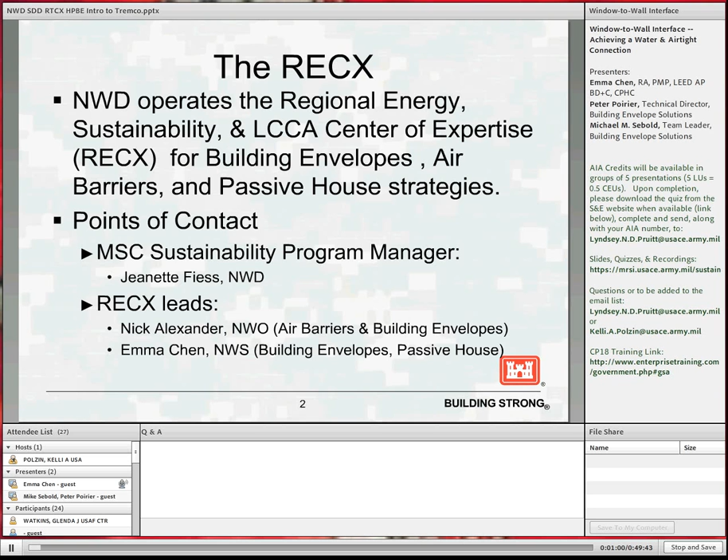Our team across NWD has put together training classes and webinars, and Nick Alexander just headed up the team that wrote the ECB and Field Guide for Construction Quality Assurance of High Performance and Sustainable Building Envelopes. He also teaches the Prospect course on building air barriers and pressure testing. The Passive House team provided reviews for Passive House compliance, and Kansas City District is...

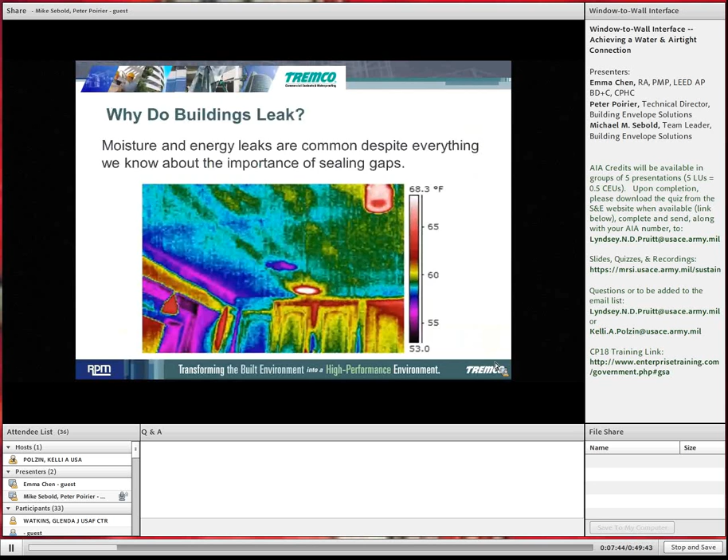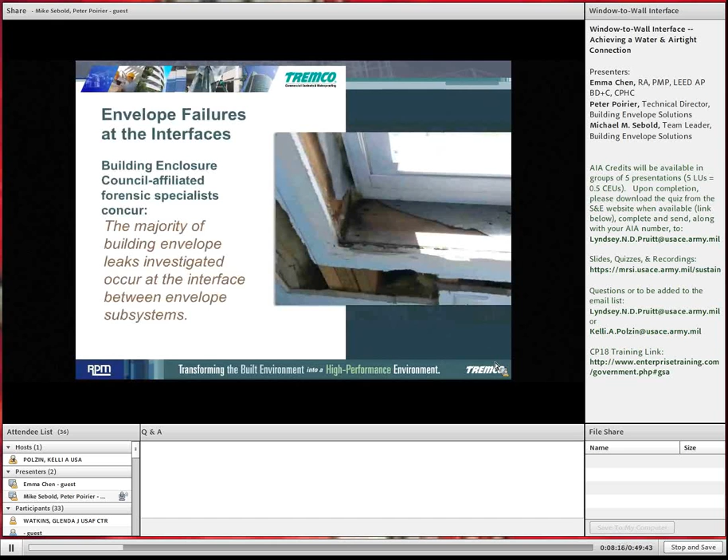So we begin with why do buildings leak? Despite all we know about buildings and the importance of sealing gaps, buildings still leak. The reasons for this envelope failure: there's no single source of responsibility for quality control, spec enforcement, and building envelope integrity, and it often comes down to accepting the low bid and lowest technically acceptable solution, which translates to failures. When we talk about envelope failures, they're traditionally at the interface. The Building Enclosure Council, as well as affiliated forensic specialists, concur that the majority of building envelope leaks investigated occur at the envelope interfaces.

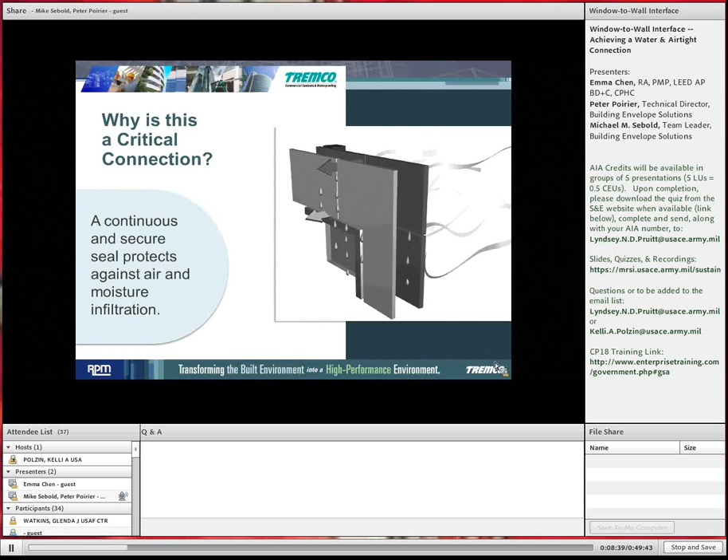So what are these interfaces? The window-to-wall tie-in connection is a transition between air barrier and window or curtain wall systems or cladding systems. Why is this connection critical? A continuous and secure seal protects against air and moisture infiltration. And why is this infiltration important? This is a critical connection to help achieve the air tightness standards you've set, as well as achieve the facility life and design life cycle of the building, to achieve energy mandates, reduced maintenance costs, and to meet new aggressive industry standards that will become building code in coming years, in particular the ASHRAE 189.1 update that will go into effect in 2015, indoor air quality, as well as risk management.

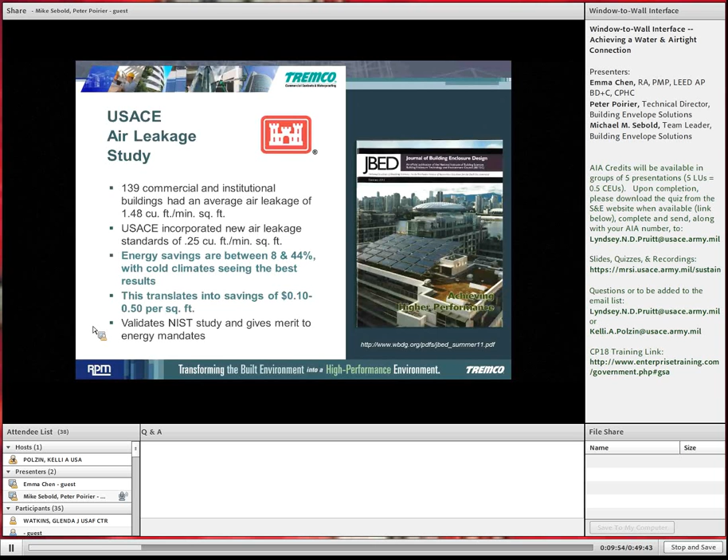When we take a look at air leakage, the Corps has been very progressive. This is a study published by Alexander Zhivov and Dale Herron of CERL that talks about the importance of air leakage and the significant energy savings that result. As you can see, this validates the NIST study and gives merit to the energy mandates, showing there's a direct correlation between air leakage and achieving energy mandates, in addition to providing better indoor air quality.

So when we take a look at current practices in real-world installations, a lot of these current practices fail under minimum performance requirements. These real-world issues arise and are preventable, but mostly they lack proper coordination, the sequencing of trades, quality installation, and on-site testing and commissioning, most of which the Corps has been addressing.

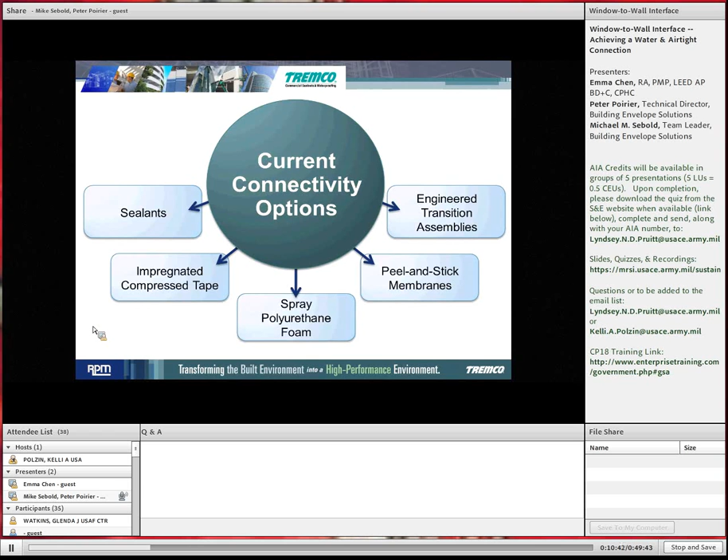The current connectivity options within the industry are traditionally sealants. We've seen an influx of impregnated compressed tapes from the European markets. Spray polyurethane foams are commonly used, as well as peel and stick membranes, and we'll close on talking about engineered transition assemblies, which is really where the market's moving to develop performance seals in these connections.

As we talk about sealant connections, they address air, liquid, and water vapor at the connection. They're traditionally a silicone or a urethane. They can handle a variety of sizes, but once you start getting to large openings, the sealants don't work that well, particularly over 2 inches. You need to match the proper sealant movement with the proper movement in the sealant joints. The windows must be set before these connections, and sealants are weather dependent.

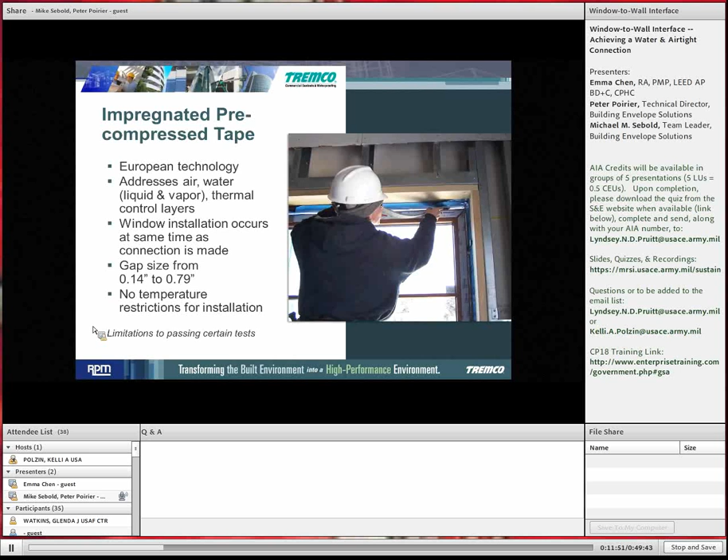As we talk about pre-compressed tapes, it's a European technology which is unique because they address both air, water, as well as a thermal control layer, which is very important in meeting your energy goals. These materials are commonly installed when the window installation occurs, and the gaps sometimes can be limited, but depending on manufacturer, you need to take a look at the sizes. But one of the big benefits is there are no temperature restrictions for these types of installations.

Spray polyurethane foam is becoming a standard in the industry, and not necessarily a good one in all applications. They still require sealant beads to make the connection to assure an air and watertight seal. Proper expansion is required of the material, so you need to take a look at the application for spray foam. The spray foams traditionally have limited pore adhesion as well as movement capabilities, and you also have a shrinkage potential.

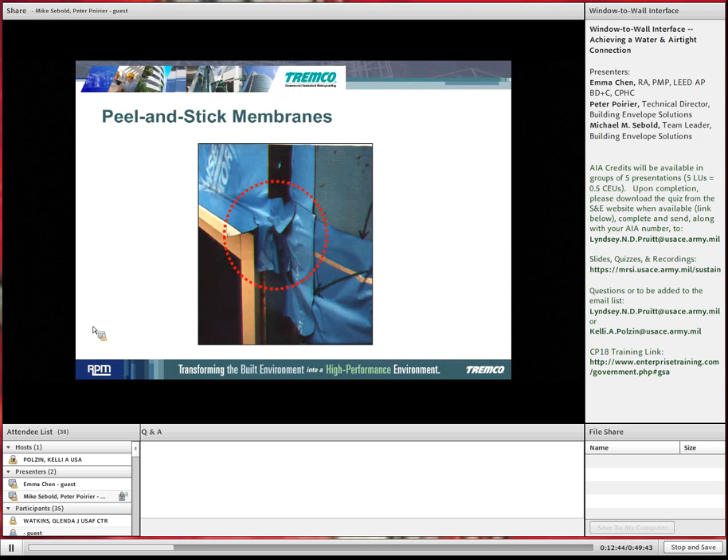So although they look like short-term solutions for stopping air and water, the long-term effect is sometimes far outweighed. Peel and stick membranes are also commonly used for this connection, and one of the challenges for peel and stick connections, as you can see here, is corners and how you lap and treat the corners of window frames and actively moving joints.

In addition to the different materials out there, we need to take a look at compatibility concerns with respect to these window-to-wall conditions. In particular, when you have air barriers that traditionally use asphaltic mastics for the connections coming in contact with sealants, whether silicone or urethane, you need to look at the compatibility. These traditionally can lead to leak point sources when the materials are not compatible.

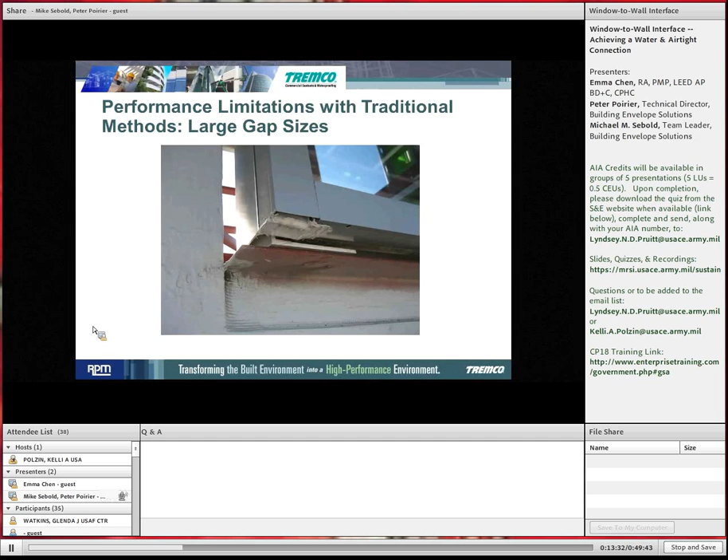The other challenge in sealing these is the limitations with traditional methods for these large gap sizes in windows. We're seeing larger and larger gaps in these openings, and traditional sealant and foam conditions can't transition these assemblies, because the continuity, especially around hollow mullions or open-ended stems, becomes critical. Long-term performance of these materials is also critical.

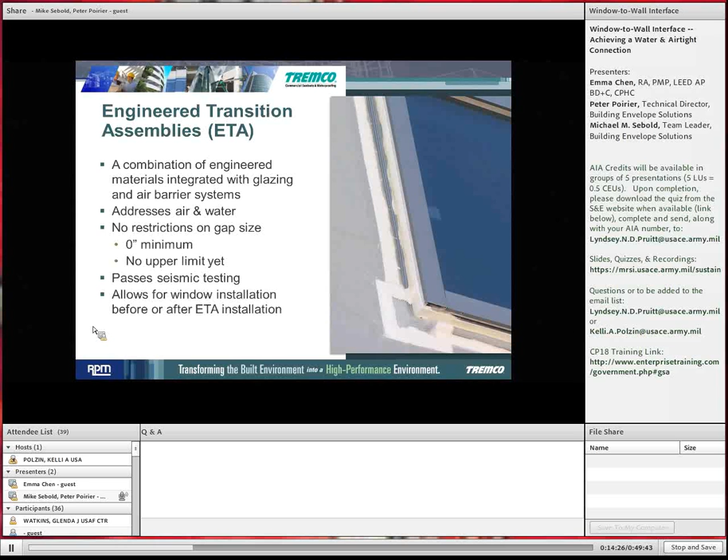This leads us to discuss engineered transition assemblies, or ETA. This is a combination of engineered materials integrated within the glazing and the air barrier systems to address air and water. There's no restriction on the gap size, so we can handle small joints as well as large joints, and it passes seismic testing, which a lot of the current solutions on the market do not. This also allows for window installation before or after, which gives the contractor flexibility for sequence of installation.

So as we talk about air barrier connections along with engineered transition assemblies, this will provide compatibility and long-term continuity for your building envelope.

These are some of the lessons we learned from U.S. Army Corps projects. Sometimes there's not enough detail from the architects on the drawings to make proper connections. If a building fails the airtightness test, post-construction fixes, which are traditionally spray foam, traditionally become insufficient.

Especially as the building weathers on, the critical connection between both the roof to wall and the window to wall has always been a connection that's been referred to by others as lacking responsibility in the trades within the field. This leaves some of the details to the contractor, which leads them to cowboying or creating field fixes for these solutions, not engineered solutions. So who's responsible for ensuring a tight seal at the window-to-wall connection?

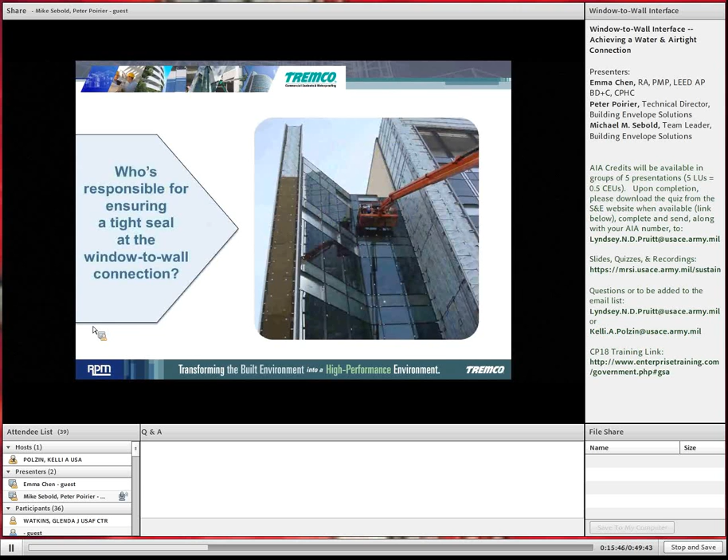Typically, as Mike was mentioning, the architect is working with simple details taken from different wall manufacturers, as shown here with a typical pressure bar system. In this application, the contractor has indicated the perimeter sealant bead on the pressure plate is their primary seal. Another wall manufacturer will dictate maybe the seal needs to be on their mullions at the structural condition. But in either case, that's their primary seal responsibility, yet they're showing very simple sealant beads.

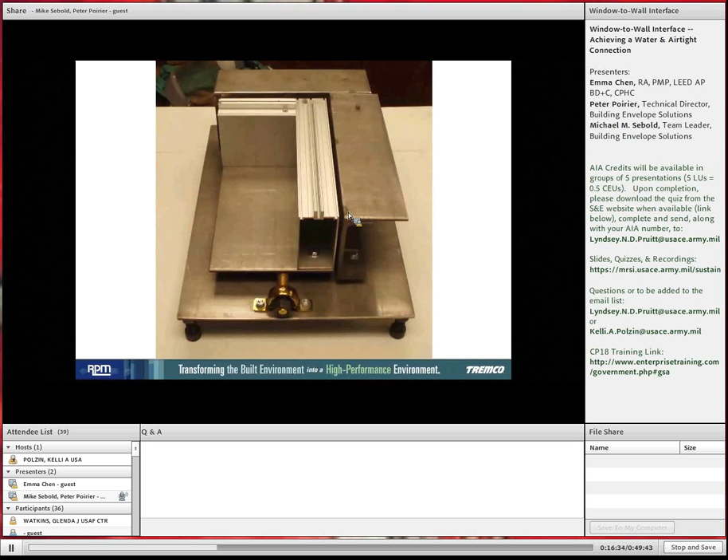From that, we went ahead and built the test jig. We took a customer's pressure bar system and mounted it in a jig. This jig allowed it to move for thermal movement and seismically, and we could also control the joints around the perimeter, increasing it from 1/4 to 1/2 to 1 inch, whichever material we were trying to achieve or test. Typical application here is a simple 1 inch joint at the head of the window.

As the sealant moves, the mullion moves down. Obviously the sealant accommodates that movement. This is the primary application, and it works fine if it's properly installed.

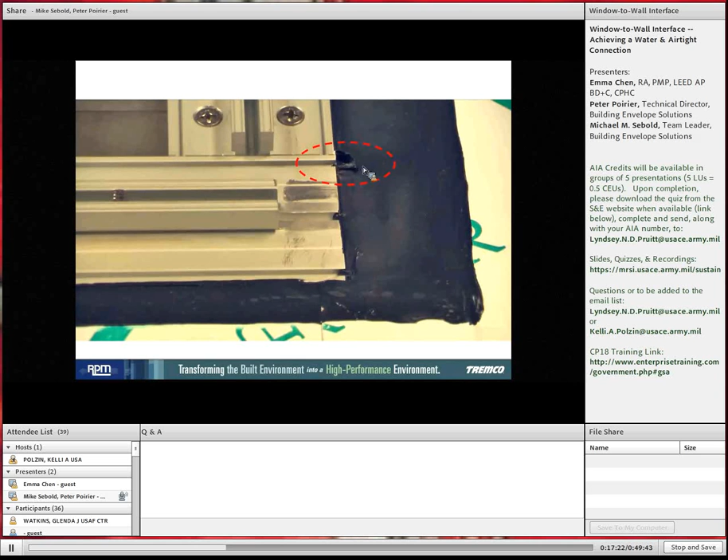However, when you start looking at a vertical condition, like we have here at the head condition, what you've got is a cut piece of metal, so we're just applying sealant along that cut edge. But as the joint starts to move, if there was an incompatibility with the sealant used to seal the metal joinery, or if the contractor left some debris along that edge when cleaning it, you may end up with a pinhole or leakage point. As this joint moves back and forth, that pinhole will actually propagate and tear further through. So when you test it, just by looking at it, you could never tell that hole was there until the wall starts to move seismically or thermally.

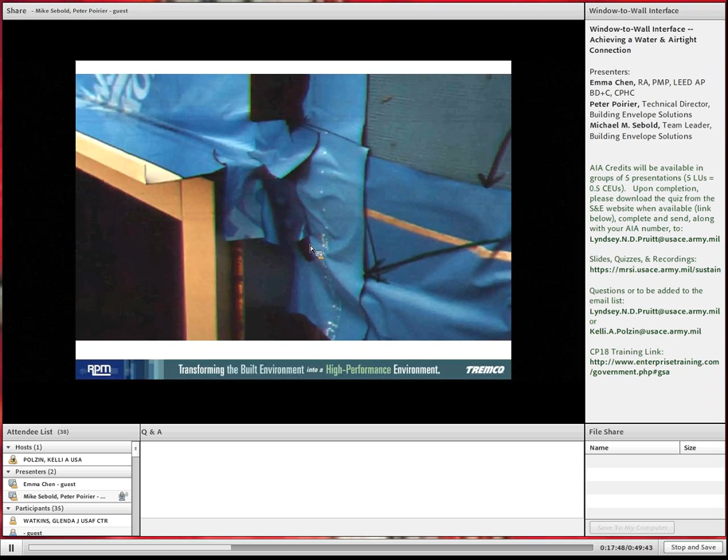Here we have an application where typically you see the wall being moved out for added insulation. It's a difficult connection to make with a sealant bead when you have open ends of metal. So as Mike mentioned earlier, people started using peel and stick products to span unsupported gaps, which isn't designed to do that.

Here we're wrapping a window in a precast condition, but as you can see up close, now the sealant is pulling away the peel and stick from the substrate, creating potential leakage and obviously aesthetically unpleasing results. It'll bleed into the sealant, and we have a loss of bond.

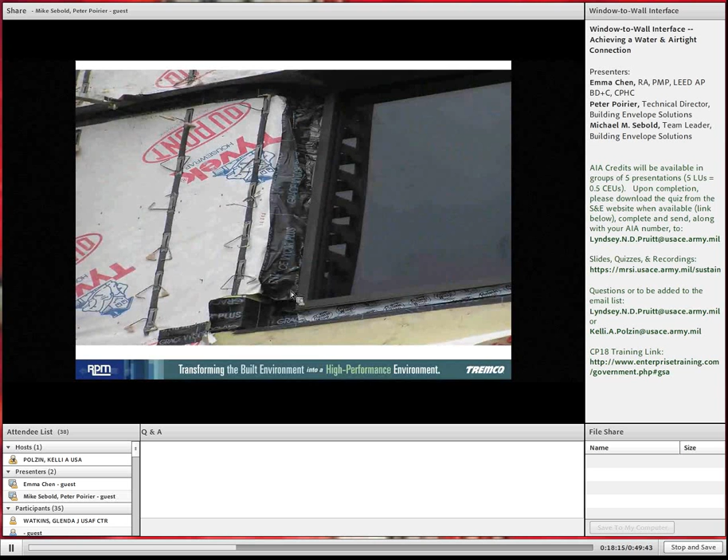Trying to mix different materials for the air barrier membranes isn't very effective. This is a building where they actually had to start tearing off the brick veneer because the peel and stick products working with their weather barrier materials weren't compatible with one another. Obviously the contact area wasn't very good, so they had to replace everything.

So to test those products, we put them in the same jig. Here you can see the product does allow it to take the movement in the head, but as soon as it starts to extend past its installation limit, it will pull itself off.

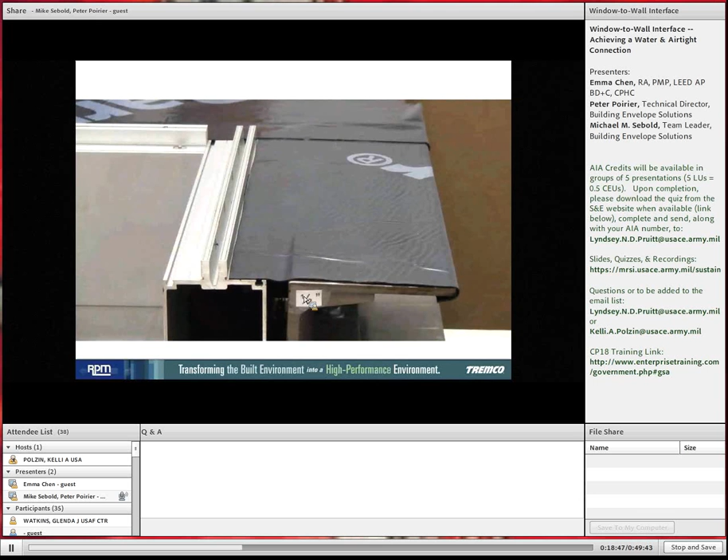Looking at the jamb condition, many manufacturers will indicate that they can span a 1/2 inch without an issue. But here we're looking at only 3/8 of an inch of movement, and what you're seeing is the product peeling off from the different substrate of the curtain wall.

In this case, you would think spanning only 1/4 of an inch of contact would be less of a problem. But here, the movement with still just 3/8 of an inch creates more shear on the membrane and pulls itself off. This is just after one cycle of opening.

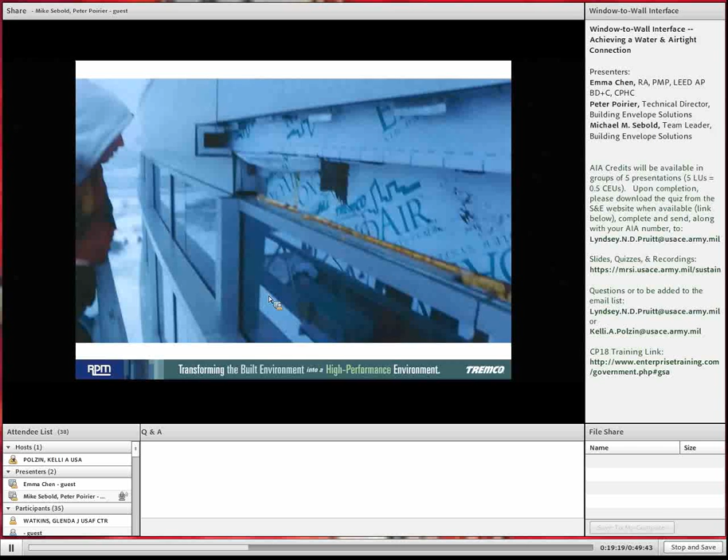As Mike was mentioning also, people are using spray foams. In this case, metal panels had to be removed because the spray foam was not effectively applied, and of course during any movement it compressed and left openings.

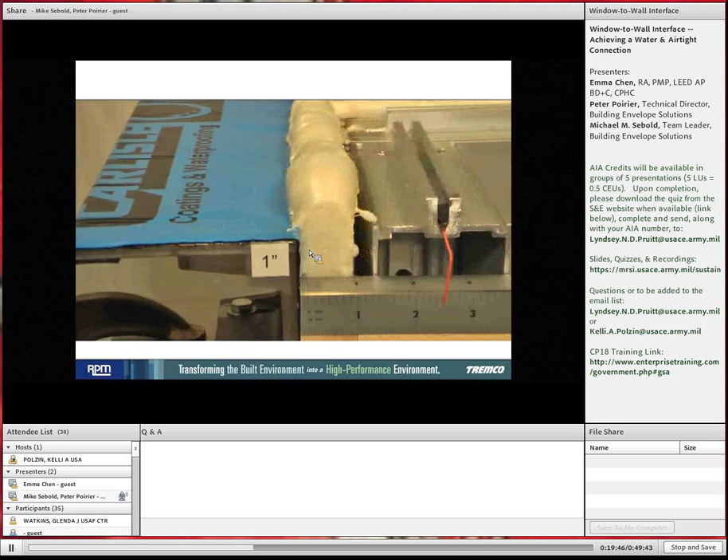So again, we applied the spray foam in the same jig to see what would happen. The foam can get compressed, but as soon as it opens up nominally, just 1/8 of an inch, we lose that bond. It's never going to reattach itself, so we don't have a seal.

The project solutions we get into, as mentioned, one of the jobs was Children's Hospital.

Written up in the Journal of Building Enclosure Design, this study was completed in 2005. It looked at materials used in a unitized curtain wall hung on the side of the building.

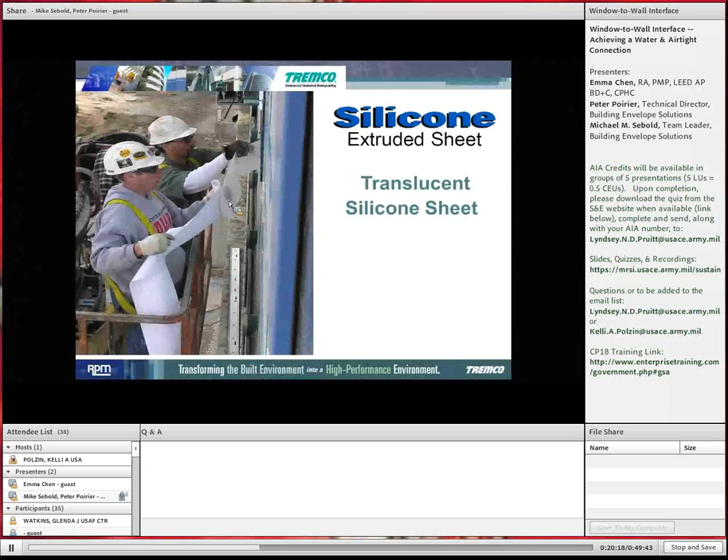They had to make a connection between the air barrier and the wall system, a very difficult application for a sealant bead to be done. So we extrude a silicone sheet, translucent, as you can see being unrolled. They were able to adhere from this air barrier to the window system, so they could tie that together.

But this was basically a Band-Aid effect. It wasn't designed to do it. They were actually able to do this for this condition, but trying to do it on the job site rather than design into it was not practical.

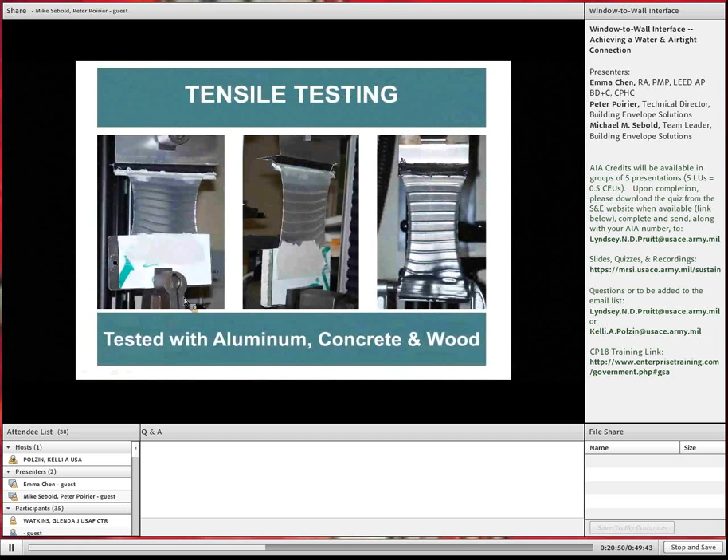So what we started to do is test these components to make sure they're compatible with one another, taking the sheet and testing it on aluminum, concrete, and wood and different substrates to make sure we have a long-lasting bond. We also tested to ASTM C1518.

This is a standard specification for pre-cured silicone joints, a test method for movement class and tear class. It doesn't dictate how much movement, but in our case we were going to test to 200% elongation versus 100%. So you would open up the length 200%, hold it for an hour.

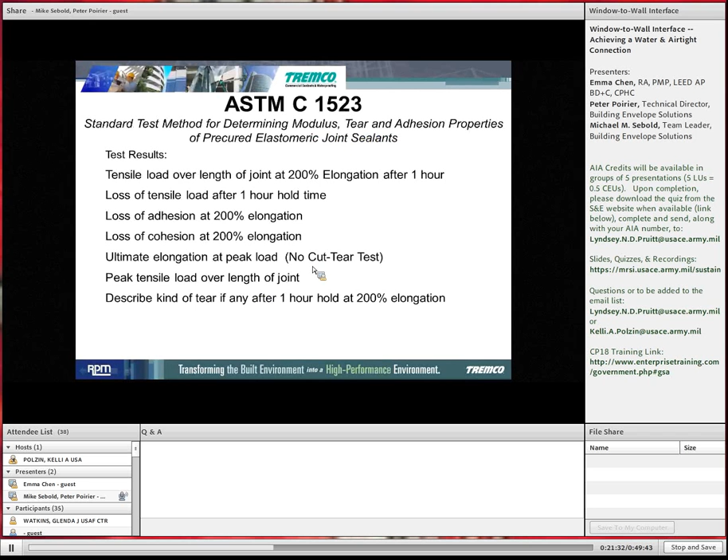Then record any loss of adhesion along the way, whether adhesive loss or cohesive loss. We didn't do ultimate elongation because in this test method they wanted to know cut tear propagation, so we ended up having to cut each system.

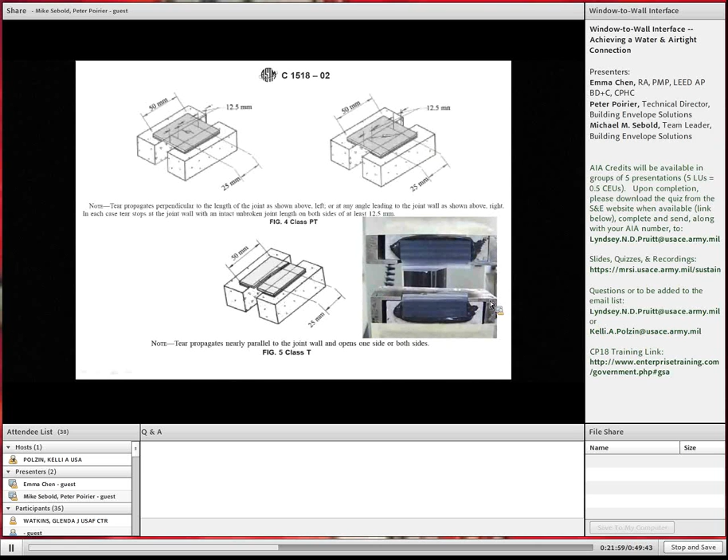Here is a plot. You hold the membrane for 60 minutes, then cycle it 10 times to make sure you still have a bond. After cycling that sample, you make a 5mm cut, and that would tell us if it zippered horizontally, which would be a class T.

In this case, the cut was made vertically. It zippered upwards, but this would be considered a class PT if the zipper had gone forward. At this point, this was just a classification. It does tear - silicones do have low tear values.

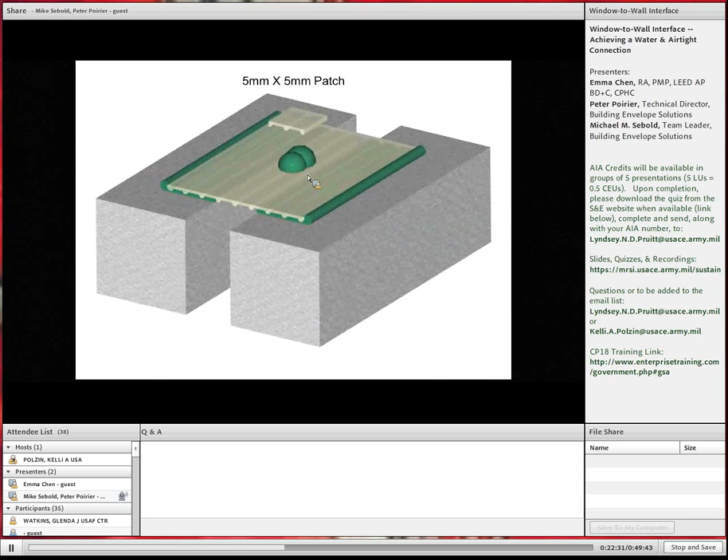But we were more interested in determining if a puncture did occur, could it be repaired and still perform. So we took these samples after testing it for 200% elongation, put the cut, applied silicone, took in essence a tire patch, the same material, embedded it, and waited 7 days, and we were able to take 200% elongation.

ASTM E2357 for air barrier tests - we're actually testing 2 different walls. We have a blank, testing the air barrier membrane, whether it be sheet or fluid, and then another 8-foot by 8-foot blank with a window, ductwork, pipe penetration, electrical boxes. Testing one versus another, you should be within 10% of each other.

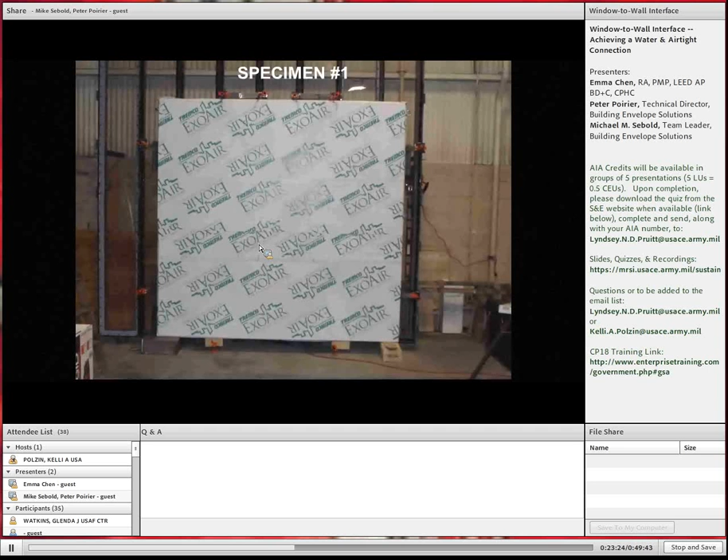So this is an 8-foot by 8-foot test wall. We built our own test walls to do this testing for air, similarly with your window penetration and electrical boxes and ductwork.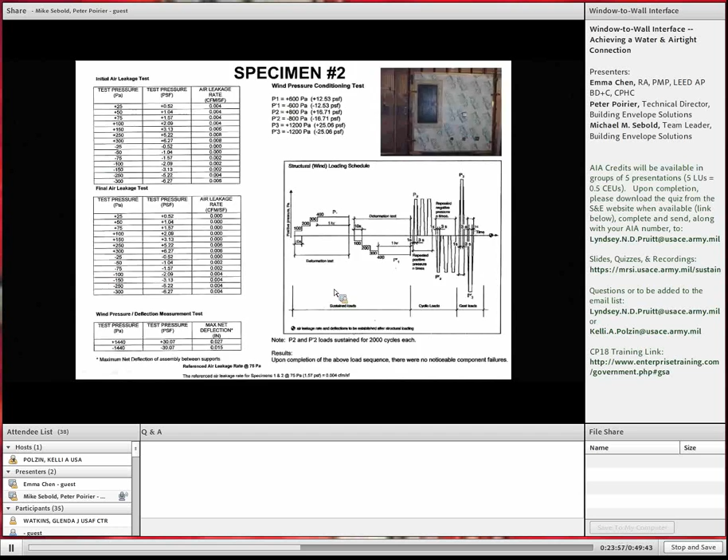Around the perimeter, you can see the silicone membrane, and in this case we just had a window in the application. These were independently verified by an outside testing agency, but this was specimen 1 with the blank, and then specimen 2 with the peel and stick. If you went through the numbers, they were very easily within 10% of each other.

But to make that connection easier, we came up with ETA, Proglaze ETA. It's a metal adapter attached to a window or wall frame. The adapter is extruded aluminum with an Alodine finish, which is a pre-treatment for paint, but we use it for all structural glazing with silicone sealants.

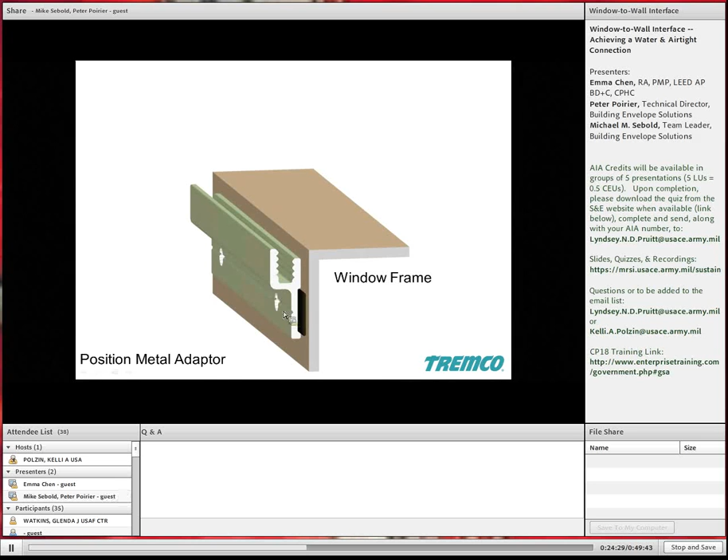Holes are 6 inches on center. The butyl tape is pre-applied. This allows the contractor to position it on the window or wall frame, and then mechanical fasteners will hold it in place. Then you come back with a silicone sealant, apply a small bead along the edge, and then you take the gasket and make the installation.

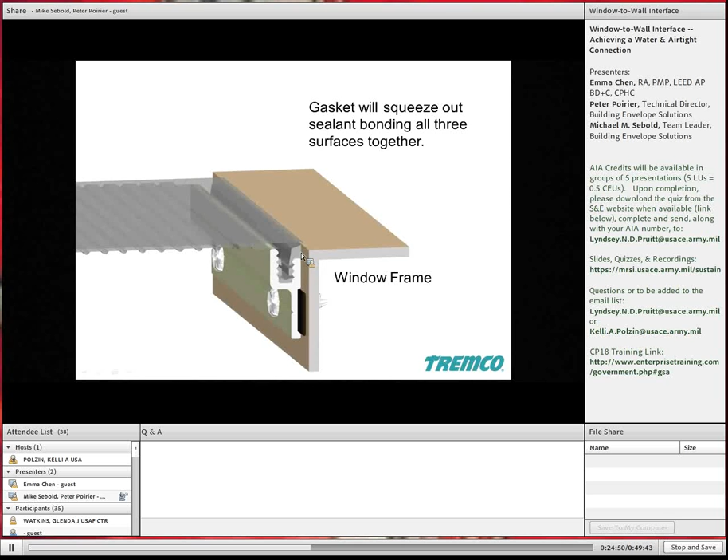We designed the metal adapter to have an offset leg. This creates a small reservoir of sealant to bond the metal adapter to the window or wall frame, and then the excess sealant bonds the gasket into position.

The silicone extrusions, which we've been doing since the early 80s, are like a Play-Doh extruder. The material doesn't have much structural strength until it's secured, so we were limited on the thickness. 1/16 of an inch was typically the minimum thickness you could extrude silicone without it tearing.

But by going to this rib design, we have the structural strength for extrudability, but we were able to thin down the webs to a 32nd of an inch. This did two things for us: one, it gave us a mechanical lock into the sealant with these ribs.

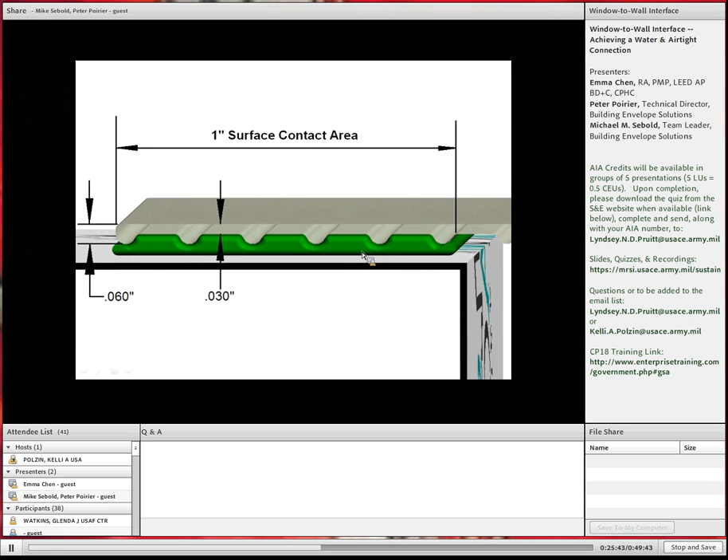Then we thinned down the web to allow more elongation, less stress on the bond line for the sealant. Silicone sealants are not adhesives, they're sealants. They need some volume of material to perform as a product. So by having a 32nd of an inch of sealant on these ribs, it prevents the installer from squeezing it down to a film, so we have some sealant underneath the membrane to create that bond that we require.

So just as an elevation detail, we would start at the bottom window and work our way up in pieces. Here we're showing the metal adapter. You peel off the release paper. This will be attached to the framing. Your sealant bead is applied.

From the exterior, we're going to do the corners first, so they're 5 inches in either direction. There are pre-molded corners with a dart that just gets embedded into the sealant in the race and around the perimeter. Because the material is translucent, you're able to see through the gasket to ensure quality of contact area. You need 1 inch of contact area around the perimeter and just enough bonding on the side of the race.

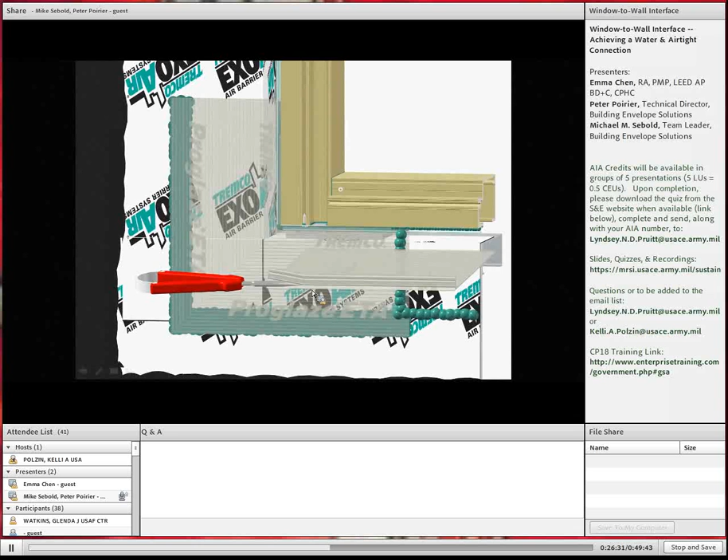The gasket also comes in lengths of 100 feet. The darts are trimmed off so that you can create a 1 inch overlap. And then you do your step flashing up the vertical. Seal around the perimeter to make sure all those lap joints are done properly, and along the edge of the adapter so that you have the contact at that condition.

As you work your way up to the jamb, up to the head, you still do the next corner, and then simple lap joints, and then finish tooling it off.

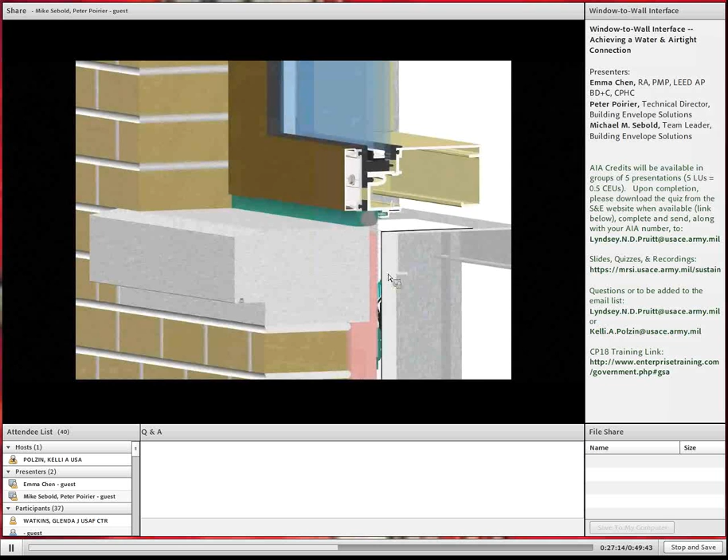So here then they can put the pressure plates to set the glass, do your brick veneer or metal panels, whichever you're using. But now we make that connection from the window frame down, in essence creating a nailing flange or drainage plane for the window assembly. And the same at the head.

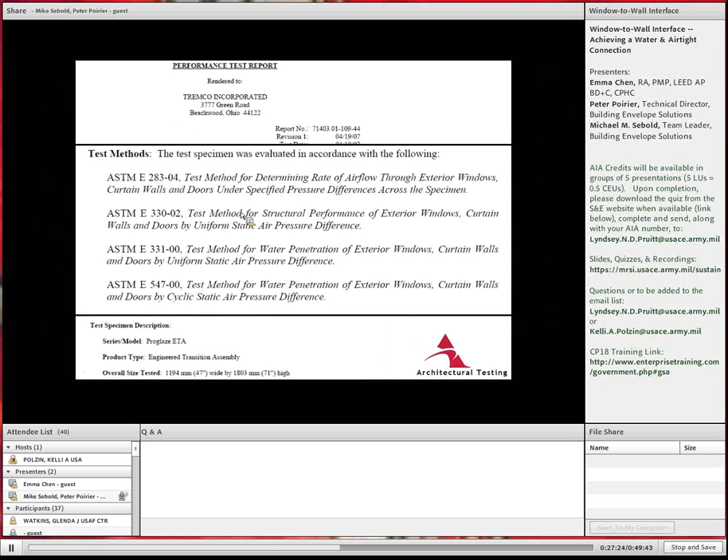This system was tested again at an independent test lab for 283, 330, 331, and 547. So these are the values we were able to get. Obviously 0.01 was the low number they'd give—0 is not a number they like to give out. But we had no air or water leakage. These are the windows that were tested.

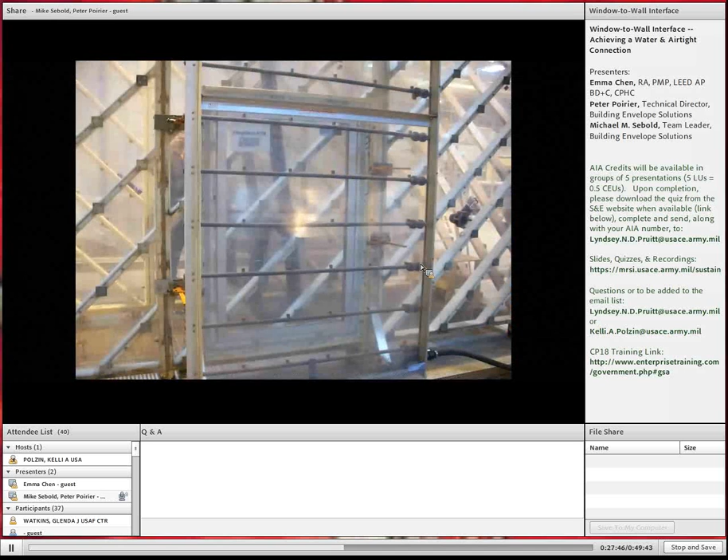We had 3 brought down, just the assemblies. Obviously, after testing for air, the water test was done. So we have a spray rack, and we subjected the surface of the air barrier and sealants to direct contact with the water.

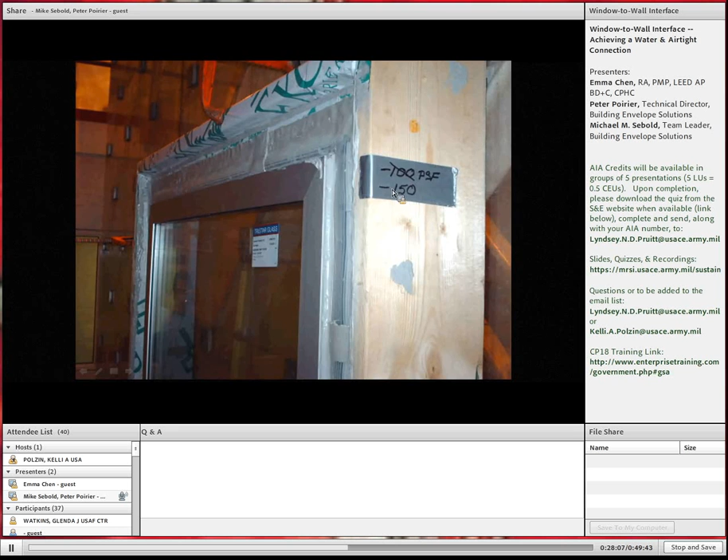So here's some shots of negative 100, negative 150. Very little deformation in the material during this testing, but that was as close as we could get before they started loading it up. This window assembly we were able to take up to 195 PSF before we had to stop because the strap anchors were actually pulling out of the aluminum. The window itself was actually designed for 135 PSF, but having the strap anchors closer together, we were able to get the value up a little higher.

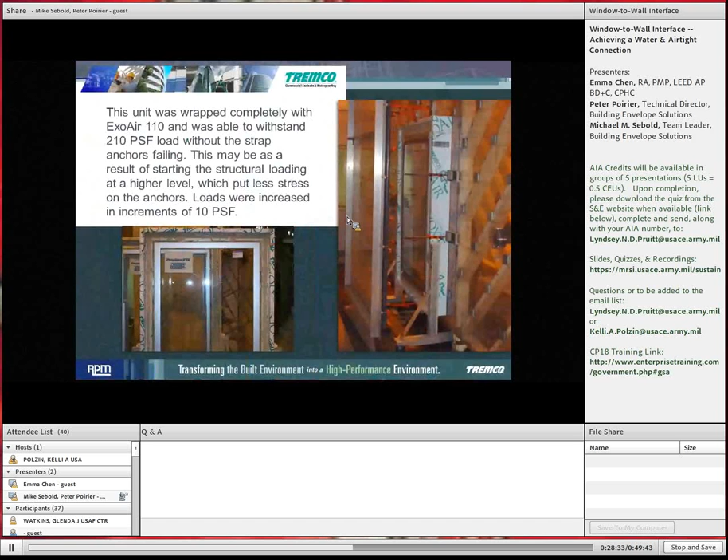The next window we were able to get up to 210 PSF without the strap anchors actually letting go. So the actual attachment with the silicone sealant and the ETA gasket never had a failure.

During this, Regents Hospital came about, and this was a unitized curtain wall, dry glazed, and they wanted to use our ETA assembly. However, the primary seal was along the perimeter of the metal, and we didn't have enough surface area to apply the adapter. So during the design phase, we moved the adapter inwards and extended the leg of the ETA to having an offset leg.

It was actually moved back further than right in the glazing plane of the glazing pocket, mainly because it was a curtain wall and these screws are going to go through. We didn't want to go into the sleeve of the expansion joints, so 4 inches was the design position. So this is the extruded shape with an offset leg.

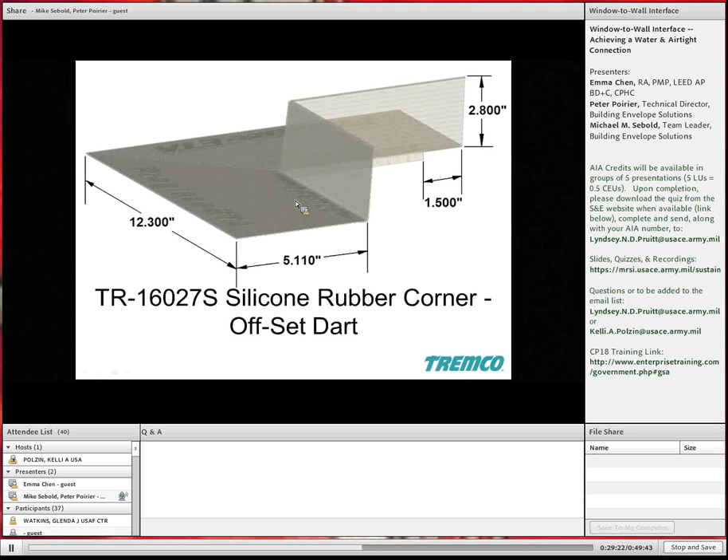We made 3-dimensional corners, so it would turn the corner of the curtain wall. Here's an illustration of the adapter already pre-applied on a unitized wall system or window at this location. Here's just an exploded view of the gaskets around the perimeter, how they would be sealed in, and then your brick veneer, steel lintel, flashing, more air barrier membrane, sealant bead.

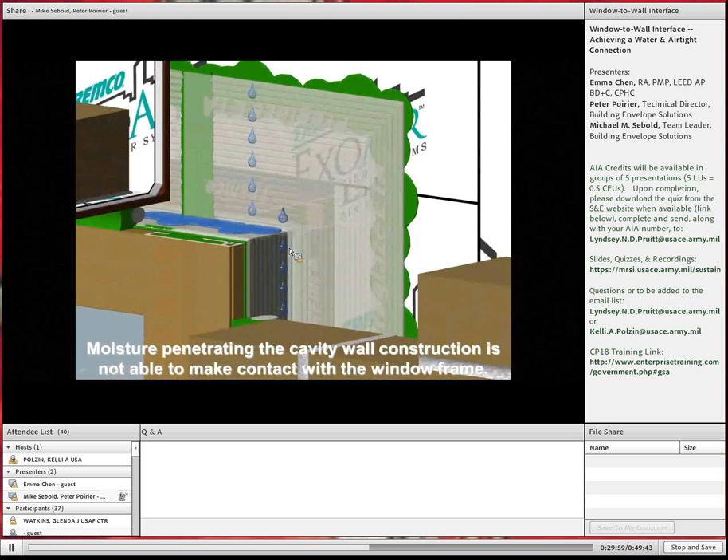But when you look inside, moisture going through either brick veneer or metal panels cannot have access to the window frame or curtain wall. So all the moisture has to collect and go around it. The wall manufacturer actually did thermal modeling and actually had an improved thermal efficiency because we're encapsulating the wall or window with the silicone membrane. This is a visual mock-up.

Metal adapter being screwed in, but it's a very small bead of sealant that you embed the gasket. Here's just the sill condition.

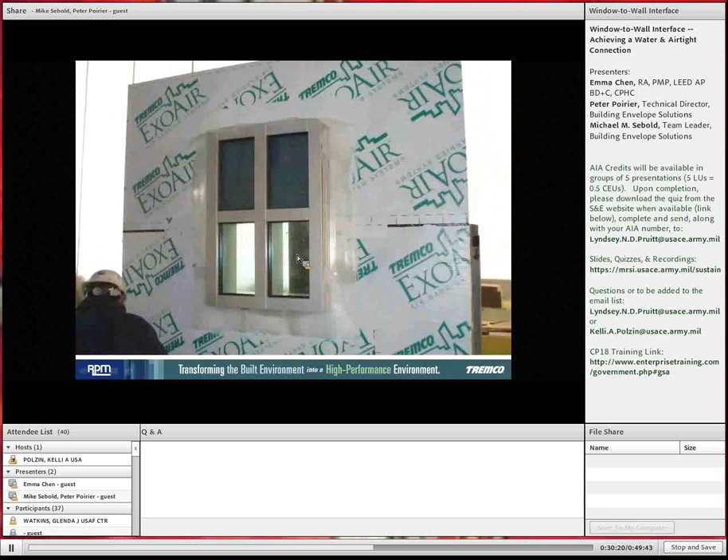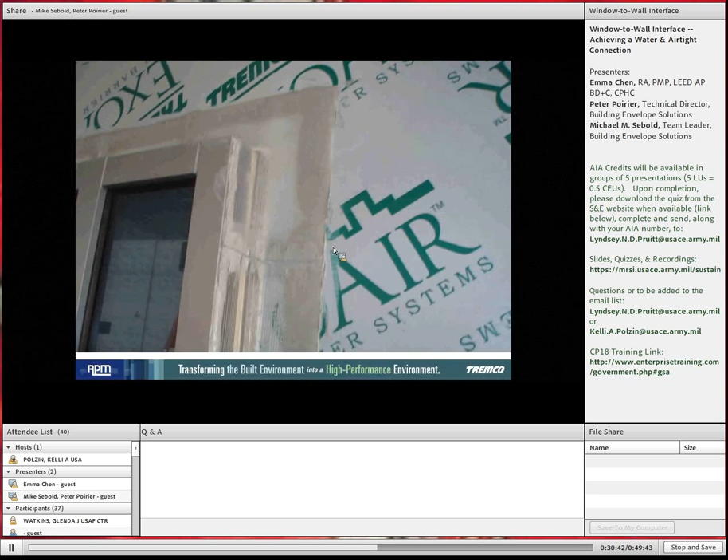Then the cut lengths and molded corners were applied. So this is just during the sequencing, applying sealant for the lap joints. Here we've got a tooled lap joint and sealant beads on either side. And there's the finished product, with at least a 1-inch perimeter sealant bead on the lap joints.

During this initial installation, the corners were put on top of the gasket, but as you look at the bottom, the corner wasn't properly shingle lapped. All our literature now does say to do proper shingle lapping or step flashing, so there was no edge pushing up the water draining down into it.

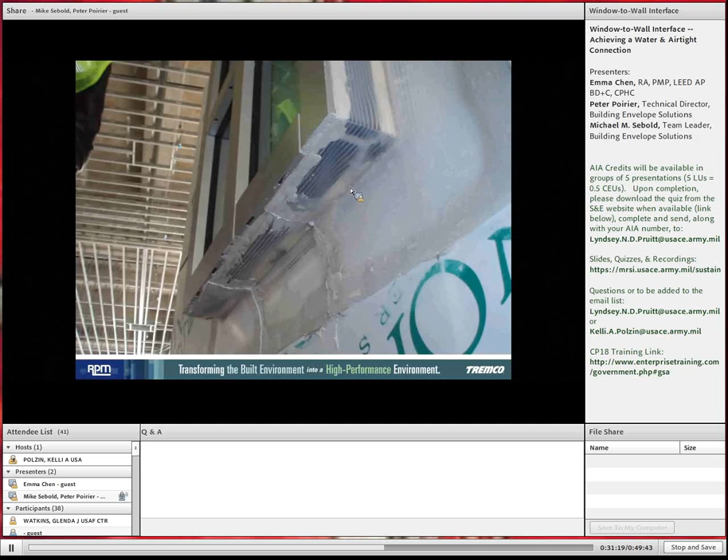Around the perimeter here, you can see the sealant bead. The slots for the weeps are left open since it is a dry glaze system, but they didn't have to put any metal end caps at the end of the mullions to seal it out. We've compartmentalized the window, so if the window manufacturer did not properly seal metal joinery, it cannot get back into the building. It will drain out through the glaze, out through the weep holes.

Across the head of the curtain wall, it's all properly flashed and no water can get in from the outside. These were the window penetrations in the lobby area, and of course the look after the brick veneer is put in before the sealant beads are applied.

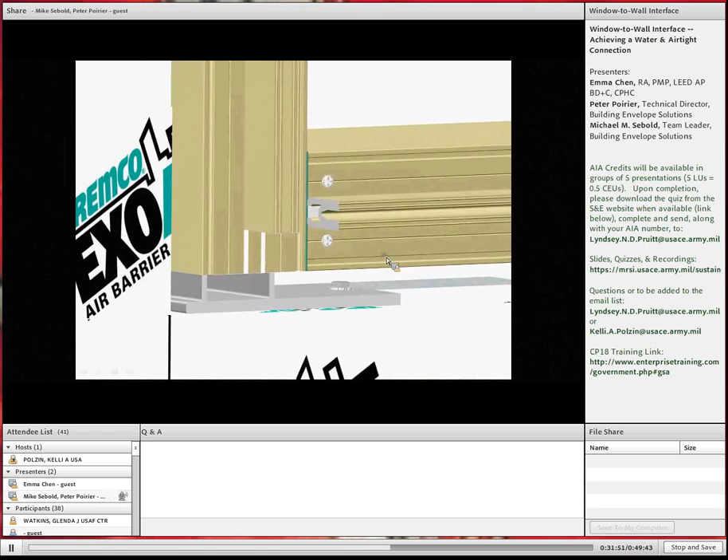So these corners are 5 inches long, so you can glue it in place. It has a smaller dart. We designed these to fit everybody's metal, whether it would be an Oldcastle, US Aluminum, Vistawall, doesn't matter. The dart is designed to fit any of these race configurations.

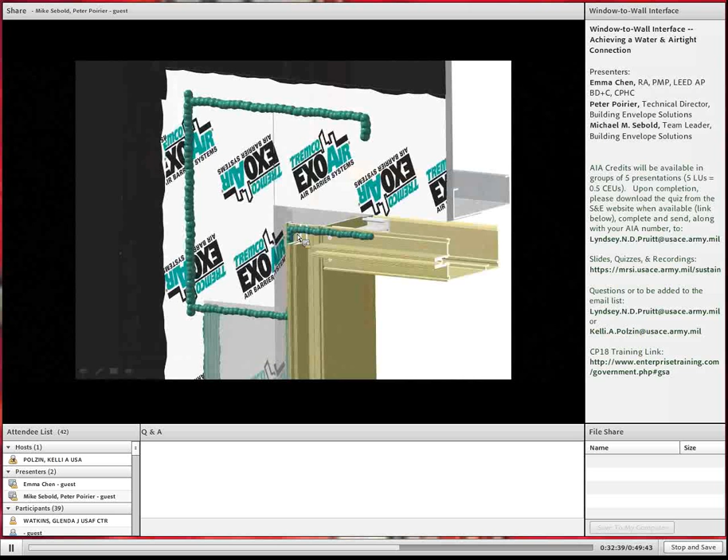And then you start to do your jambs, and then your perimeter sealant bead. Then you work your way up to the head, and then across the head of the curtain wall, tooling the sealant around the perimeter. Here you got your Dutchman, start setting your glass, pressure plates are applied, and then you could come in with your veneer, whether it be brick, and then come in with your sealant bead.

Now the exterior sealant bead, snap covers, up close. Now this exterior sealant bead is just decorative. The interior seal is your primary seal back at the drainage plane of the curtain wall, again with the air barrier. Now in this case, obviously this wall is designed or drawn up to be everything in plane.

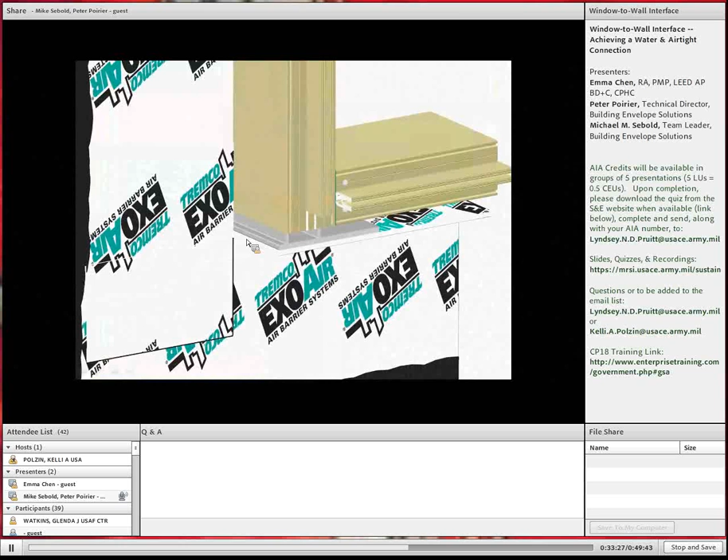Doesn't always come that way. A lot of the walls are being moved outwards to help create larger volumes of insulation. So in this case, we've got a steel lintel where the curtain wall is cantilevered out from the wall. So we've manufactured 3-dimensional molded corners that could be stacked and create the stair step after trimming them around the corner. And then the other gasket just bends around the perimeter and then up to jam condition.

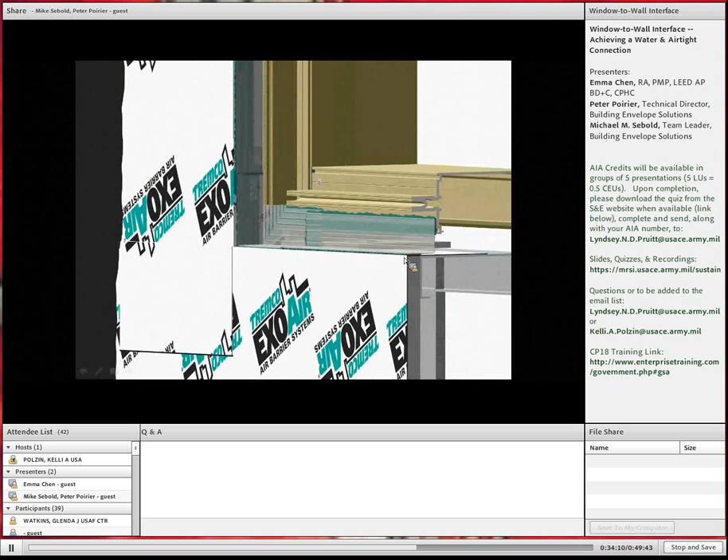If the wall is recessed into the rough opening, again sealant was applied, your molded corners trimmed down, embedded, and then your gasket around that perimeter. But now it's being recessed. Again, we only needed 1 inch of surface contact here around the perimeter, so the gasket doesn't have to move out to the outside face of the curtain wall or sheathing. Just needs to make sure there's sealant applied along that edge, so no moisture or debris can work its way underneath or inside the wall.

We took this system and took it out to have it independently tested for these test methods. But we did a few more, since working out a lot more seismic conditions. So we were testing for air, static, water, and then dynamic loads, structural testing, but then we wanted to rack the unit for seismic conditions.

And then we would repeat air and water, and then take it to destruction. This was the test method and testing results we achieved. Again, not giving a zero, but we were able to take this up to 150 PSF.

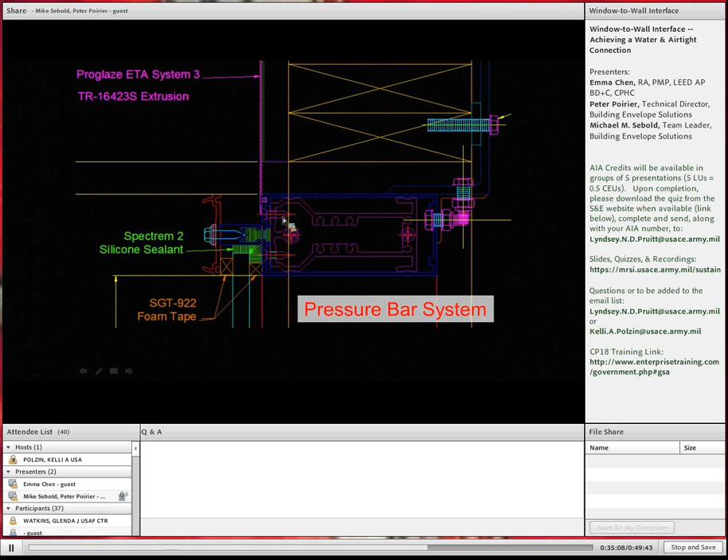We took a 1600 planar pressure bar system and structurally glazed it in place because we didn't want to test the actual wall or window. We wanted all the stress to be put on the membrane connected around the perimeter. So the pressure plate was put on to mechanically hold the plastic in place, so we weren't going to let that go depending on what load we went to. So all the stress was going to be on the perimeter gasket.

We made a small window because we were going to be racking it 2 inches in either direction. The bolts on the other side of the frame allowed us to mechanically move it, and we slotted the anchors to allow this to be moved. So here we have a 3-inch gap, so we could rack it 2 inches in either direction.

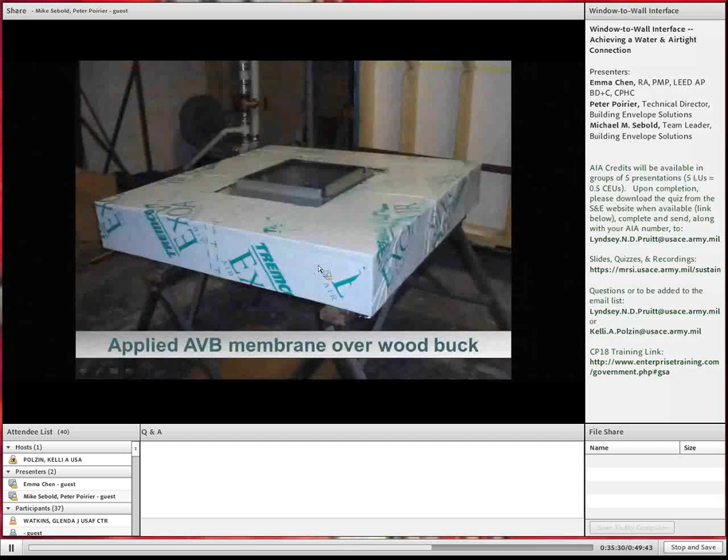So after getting that assembled, we wrapped the buck in the air barrier product. We dry fitted the molded corners. Again, you can see that the mullion stem needs to be milled away. And during any testing, you always want to know where you believe your failure mode is going to occur.

In this case, we only have between 3/16 and a 1/4 inch of surface contact area underneath this mullion, and no raceway to plug the dart in. So this is our weakest point of the whole system. This is where we felt was going to be our failure mode or location.

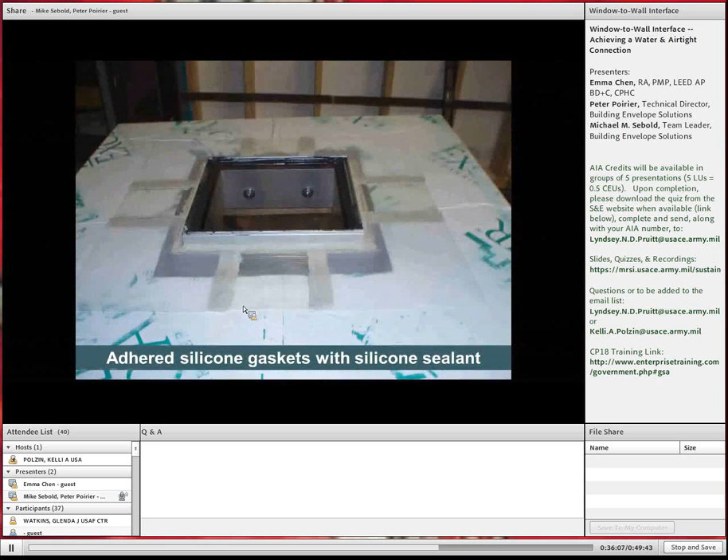So here's just a shot of the dry fit of the corners, dry fit of the gasket cut length with simple 1-inch overlaps. So we started sealing the gasket in place and then finished off around the perimeter. Again, this showing how we had structurally adhered the plastic in place, so we didn't want to test the window at all.

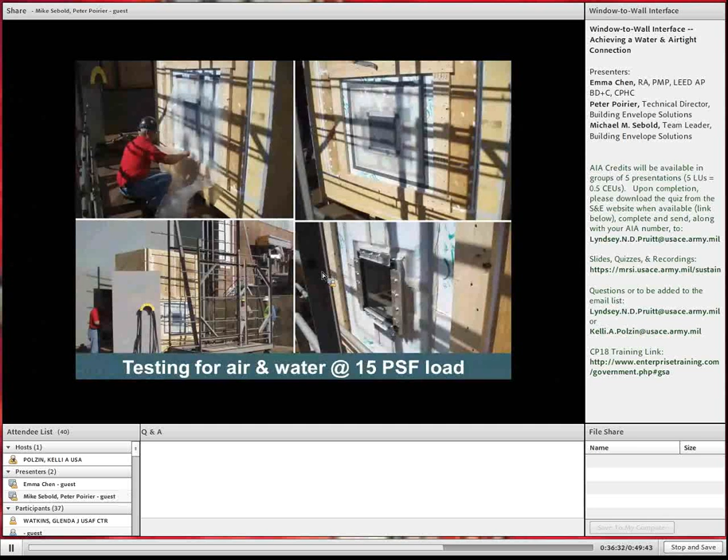The testing organization built us a test chamber, put our buck into it. Just a view from the interior. They're bagging the assembly to test the difference between the chamber and our assembly. Then testing for water, looking for any leaks. No leaks occurred, so they were able to do dynamic testing.

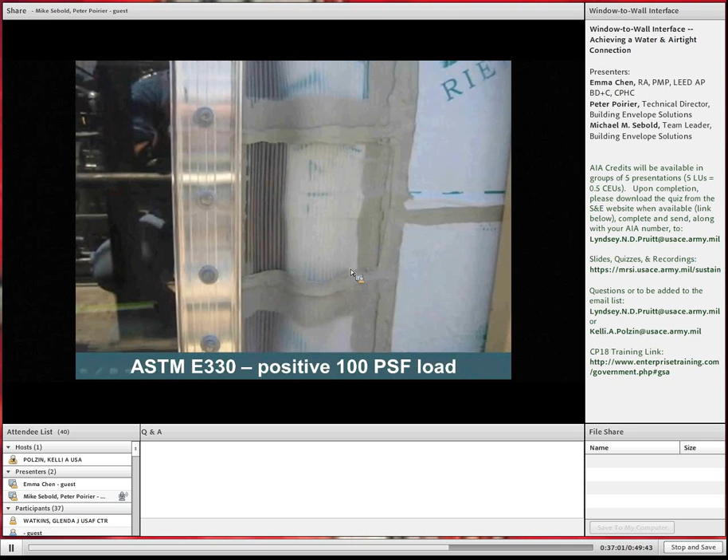115 miles per hour was as high as they could do for Category 3, sustaining 15 minutes. Some shots during the interior during that loading in water with no leaks. On the exterior, after the dynamic load, we went ahead and positively pressurized it at 100 psf.

Here you can see the gasket being sucked in around the perimeter. Again, we left the pressure plates off from the corners because this is where we wanted to be able to do inspections while the testing was going on. So we were able to make sure that there was no bond loss.

We also didn't put any pocket fillers in. We wanted all the stress on the bond line of the membrane so that the pressure plates were not contributing to help hold the gasket in place.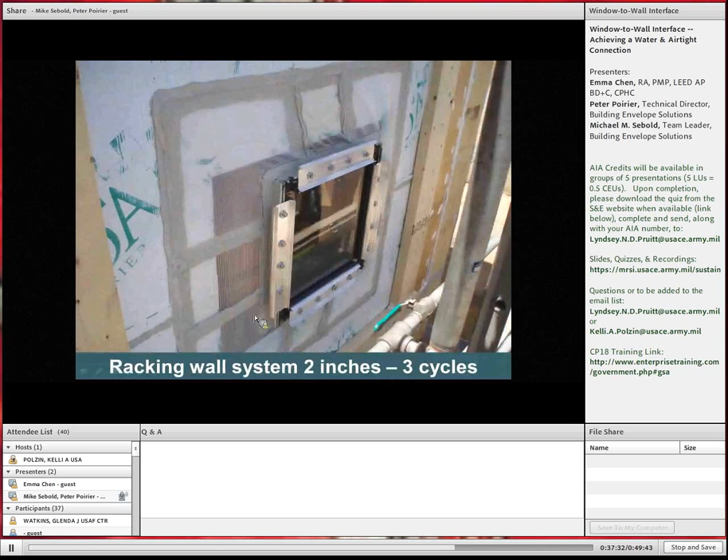After passing the 100 psf loading, we went to racking the wall 2 inches in either direction, 3 cycles. So here's the elongation on one side and the compression on the other. Our sealants and membranes, as currently used, would not be able to accommodate this. So these are just shots from the interior, showing and documenting that we did move it.

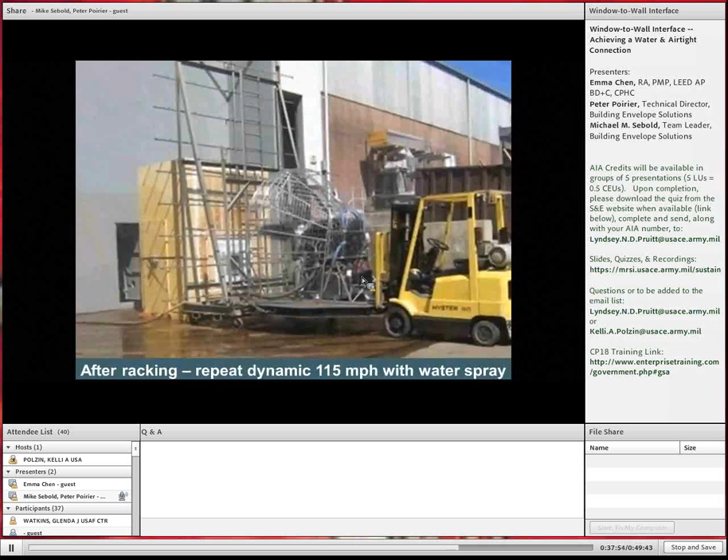We repeated the dynamic load at 115 mile an hour with water spray with no leaks. Then we subjected it to 150 psf structural load. You can see it being sucked in around the perimeter. Now our negative 150 psf with no failure.

Unfortunately, at this point in time during the test, the failure became the chamber itself. The plywood on the back side let go, and we couldn't take it up any higher than 150 psf. So you can see here we had very good adhesion around the perimeter.

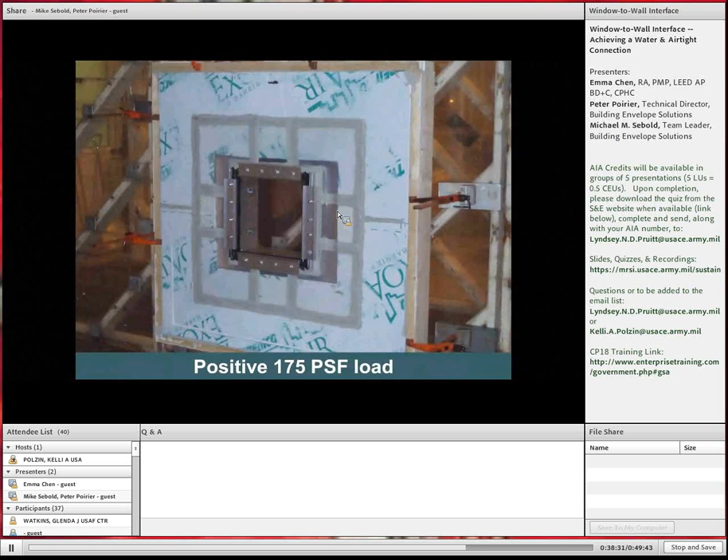But the next day we took the buck inside to have it on our test wall. Since we no longer had a racking system, we were just seeing what the net positive load could be, or highest load. So we were able to pass positive 175 psf without a problem.

At 175 negative, we started to have some deformation in the gasket, and it eventually tore. But we didn't have a tear in the membrane or adhesion. It was the actual gasket that ended up failing on us.

So this was, we couldn't report 175 as a finished number. 150 was the highest PSF loading. This brings us to New Parkland Hospital.

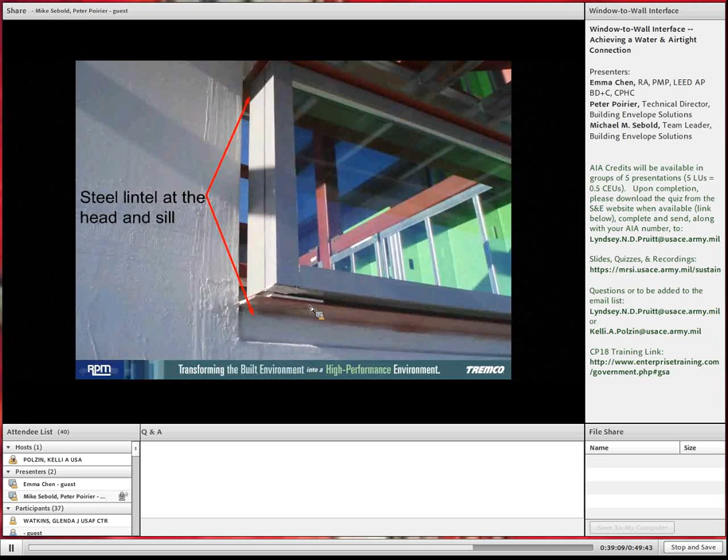During the design phase, we got into the mock-up and found there were going to be steel lintels in a lot of these openings supporting the window. This would cause some issues with how to seal it properly. So with the cantilever F anchors and T anchors we were going to have, we needed to be able to seal around these conditions.

Working with the architect and the GC, we were able to get those stopped back short of the rough opening so they didn't extend past the window frame. This would allow us to bring in our molded corners to seal those, so you'd have a nice finished condition around the perimeter to make that continuous seal.

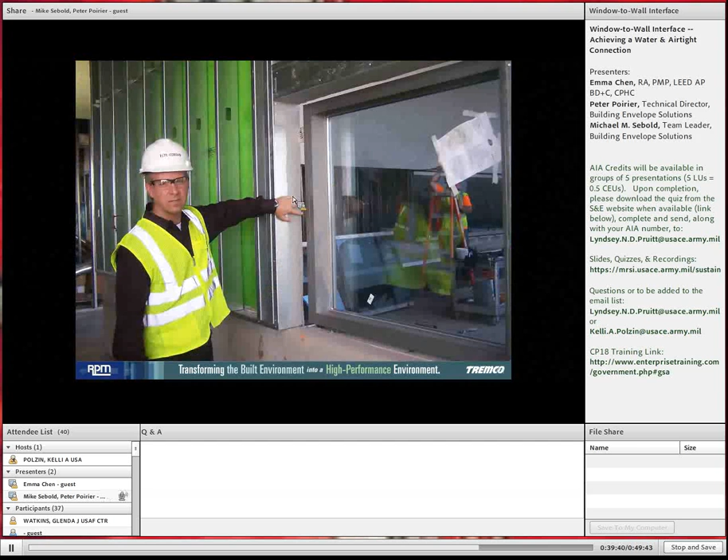Some of the windows actually sat out from the rough opening, so from the exterior we were anchored on the outside.

As you can see here, they decided we were going to take the three-dimensional molded corner and make the transition from the air barrier. This was a liquid applied air barrier vapor permeable, that can make that seal, and then take the rib silicone sheet in transition over the anchors.

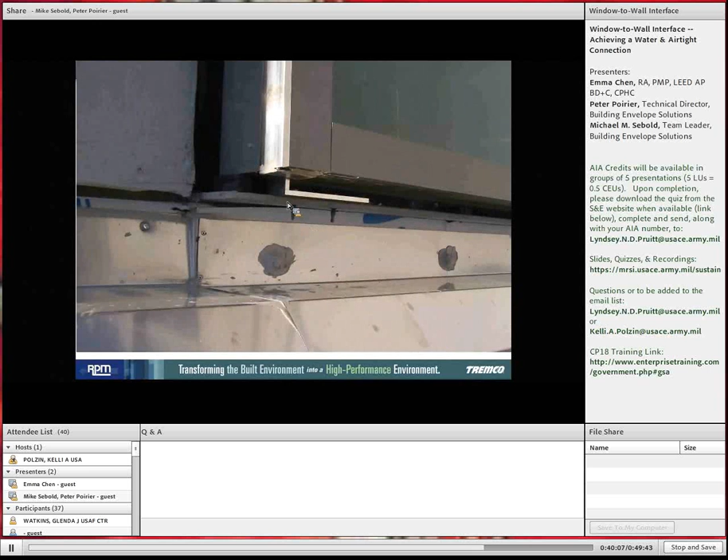So at the bottom with your steel lintel, the screws were cut off. They could actually make the molded corner, seal it in place, and then just bond the silicone gasket to the bottom of the curtain wall and to the bottom of the steel lintel, working their way up the jambs, going over the anchors, and across the head of the window. That was your finished look.

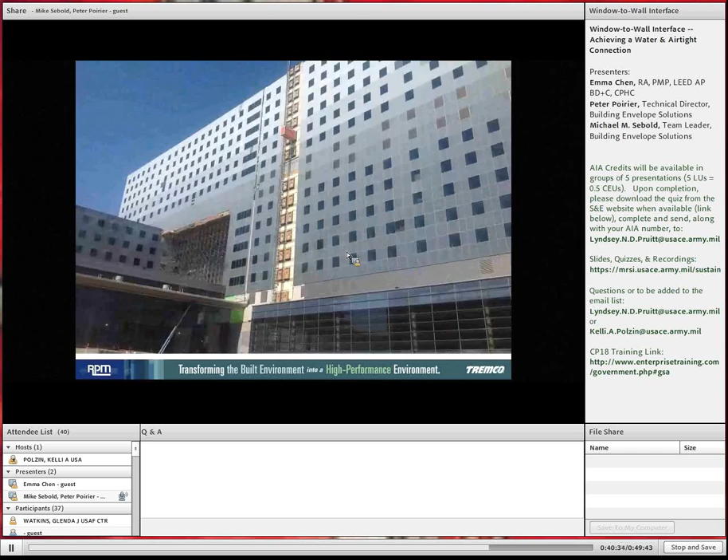They had both stone and metal panels.

The last project we have is Camp Pendleton. The ETA making the connection around the window wasn't in the condition they had, but they did have seismic drift joints. Looking at the actual sill condition, they had metal flashing wrapping around each of the openings that the sealant bead would make that seal. At the head condition, again, metal flashing.

And at the jambs, again, another piece of metal flashing, which had to work within a drift joint across the head of the curtain wall. So the architect worked a lot of different details and different components to do a proper sequence of installation. So we drew this up in 3D.

Here we have a rough opening, half of it, to the right, with a seismic drift joint across the head which continued. So they would wrap the rough opening with a peel and stick product, then starting at the bottom with the metal flashing, at the jamb, and then counter flashing with your air barrier membrane. Then we would allow you to put your sealant bead and silicone strip to create your seal for the drift joint, then it would continue with the next piece of flashing.

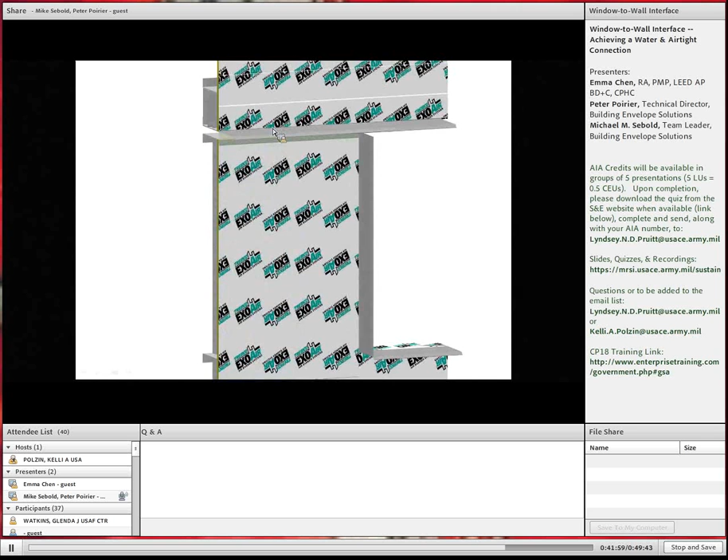Staggering it, shiplapping another peel and stick over the top of it. This would allow now taking the three-dimensional molded corner to transition into that condition. And because the corners were only 4 inches in dimension, they had to come out over 6 inches, so they just took a strip of the silicone sheet and bonded it.

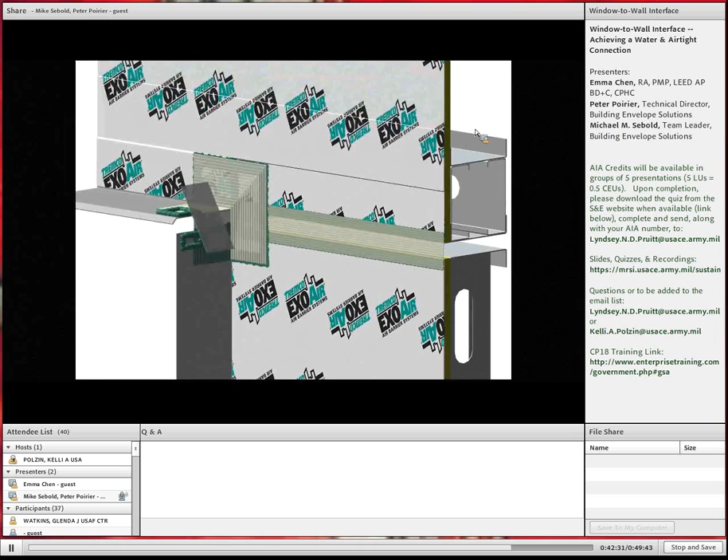On the opposite side of the frame, some of these conditions, they'd have the membrane, the steel flashing, again shiplapping the peel and stick, and then taking the three-dimensional corner, gluing it in place, and then making the extension. So these are some shots during the actual mock-up, during installation.

So they've got the sill membrane and up the flashing and up the jambs. Here they've already got the metal flashing on top of the air barrier ETA gasket across the side of the drift joint. Here it is continuing on to the right side of it.

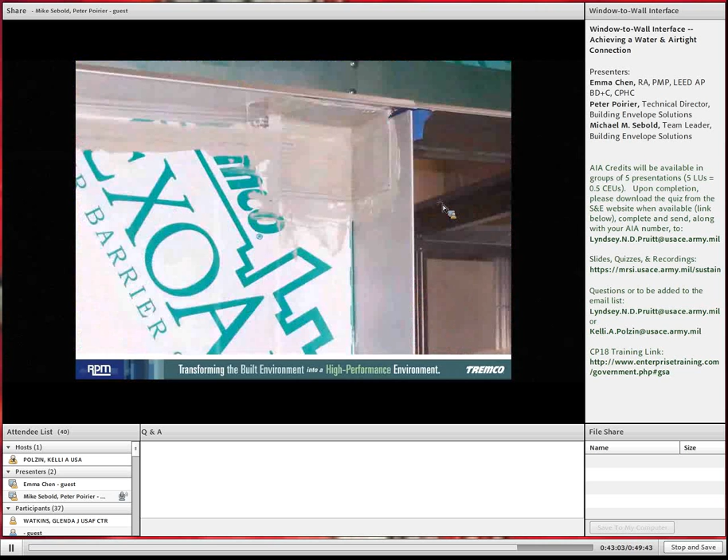Molded corner. And then the outer side, step flashing it. So here are the job site conditions, gluing in place. The opposite corner where they cut the corner down, not having to go out as far. And the finished look.

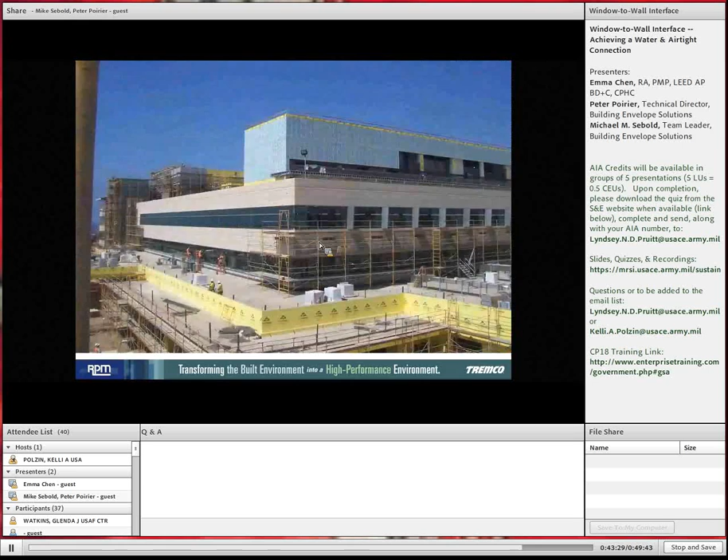And if you want to read more about the project, it's in the Military Engineer. And if you have any questions.